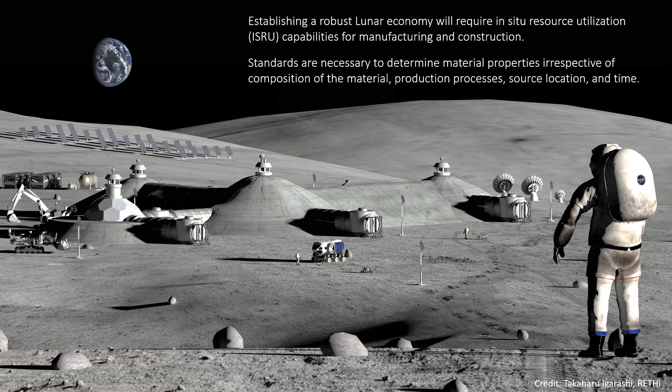According to NASA's Moon to Mars objectives, establishing a continuous human lunar presence will require in situ resource utilization capabilities for manufacturing and construction. To construct safe and durable structures, several types of standards will be necessary to determine material properties irrespective of composition of the material, production processes, source location, and time.

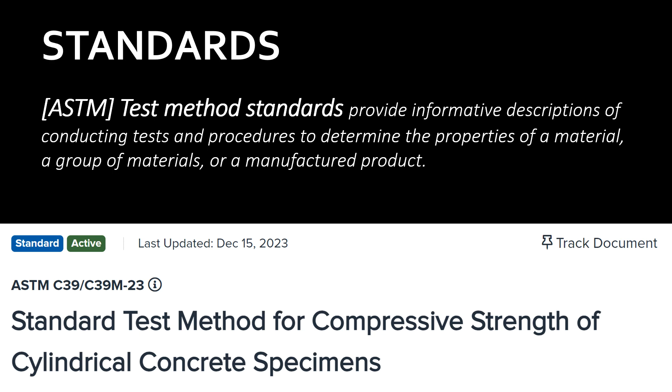A standard is a guideline to perform a type of test, evaluate the results, and define acceptance criteria. They are a necessary tool to perform testing on a uniform and consistent basis. Irrespective of the process used to manufacture a structural material, the material must be tested for strength and performance at scale. Several important gaps exist related to the design and construction of lunar structures.

On Earth, structural design is dependent on well-constrained hazards, loads, and serviceability demands. Structural engineers use these and then design using an appropriate factor of safety or targeting an acceptable probability of failure. These aspects are ingrained in codes and standards that have been accumulated from experience over decades and even centuries.

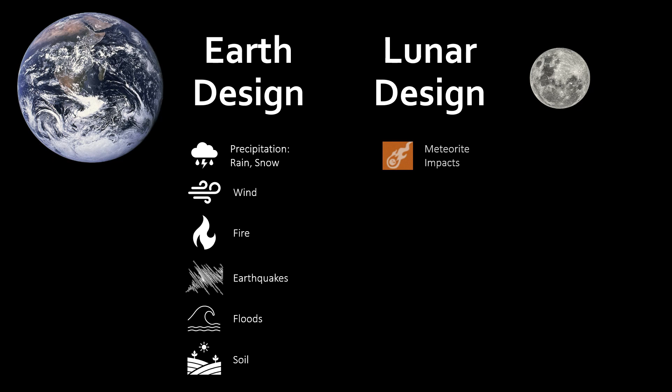The Moon is an extremely hostile environment. Lunar structures will be exposed to hard vacuum, huge thermal cycles, radiation, moonquakes, and micrometeorite impacts. These, combined with the lack of engineering experience in such an extreme environment, mean that engineers must heavily rely on testing of the materials to develop the data needed to design and build safe structures.

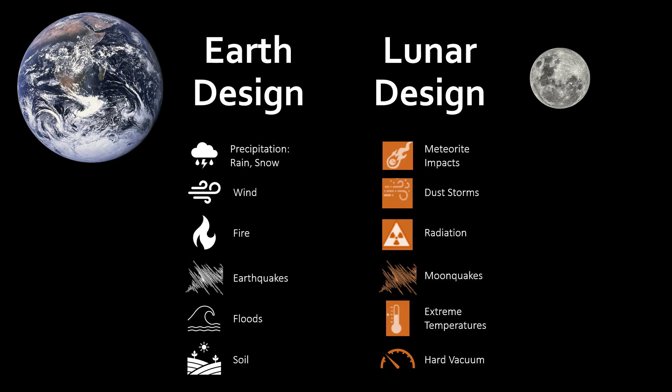As an example, let's explore one of the first ISRU structures planned for the Moon, a launch and landing pad. Aside from quantifying the expected hazards, mass, and payload, engineers must know the behavior of the proposed material under the extreme conditions on the Moon to design this. The environmental factors will influence the strength, behavior, and durability of the material. Plus, a wide range of construction materials and technologies are being proposed for lunar construction using in situ materials.

Regolith-based materials seem to be quite similar in many ways to concrete on Earth. Regolith materials are expected to be brittle materials. They are also expected to have a low tensile strength compared to their compressive strength. However, there are significant gaps associated with the use of regolith-based materials due to the extreme lunar environment.

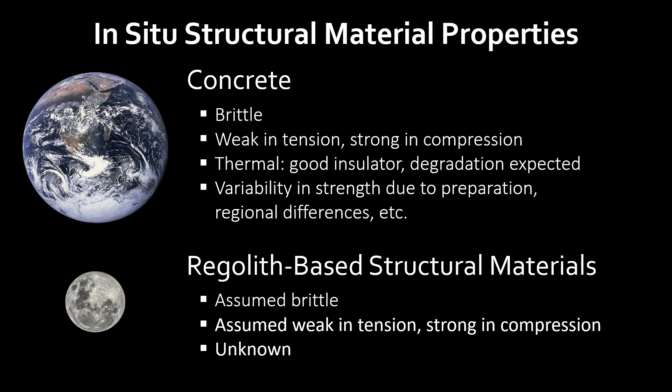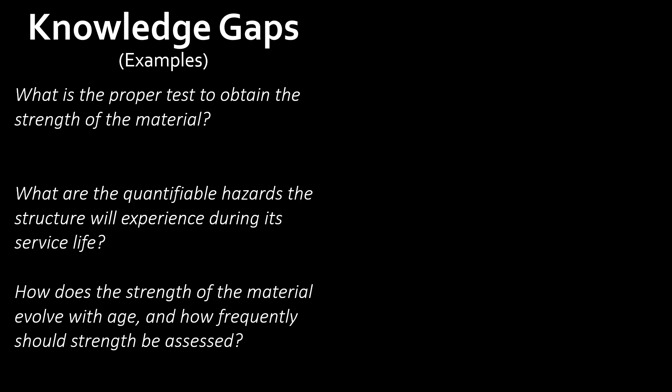Several knowledge gaps exist for the design of lunar structures. For example, what is the proper test to obtain the strength of the material? What are the quantifiable hazards the structure will experience during its service life? Many technical gaps also exist. For instance, how would the data from a standard test be used for the design of structures? And overall, what is the acceptable probability of failure for a structure on the Moon?

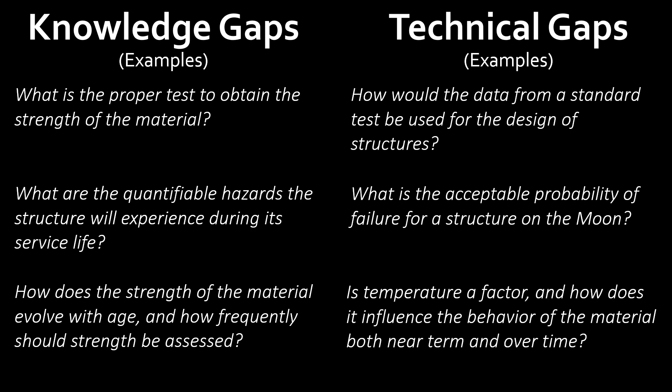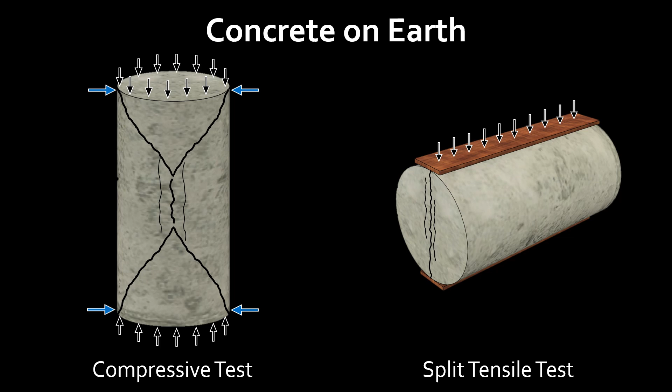A roadmap to establish the standards is needed because we need to deal with a new construction material that we do not have experience with. To illustrate that, we look at our experience with using concrete, a similar brittle in situ material. On Earth, the design of structural concrete is dependent on testing specified by ASTM standards. The most common standard test for concrete is the compressive test, in which a cylinder or cube test specimen is loaded under axial compression.

In structural engineering, the compressive test is important for obtaining structural properties of the material for design. Through ACI code, these values are then used to derive additional structural properties, such as tensile strength, since concrete is difficult to test in tension. The compressive strength is verified throughout a construction project to ensure a consistent strength is achieved.

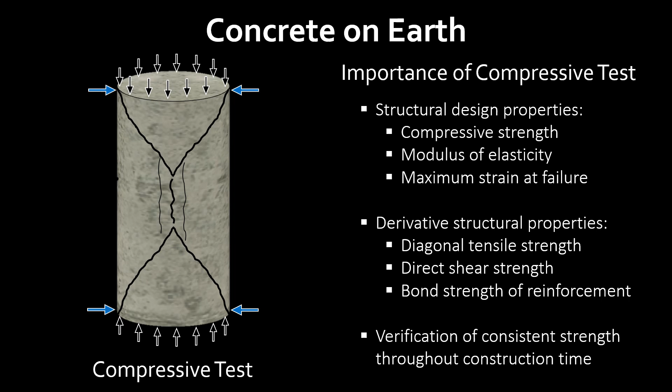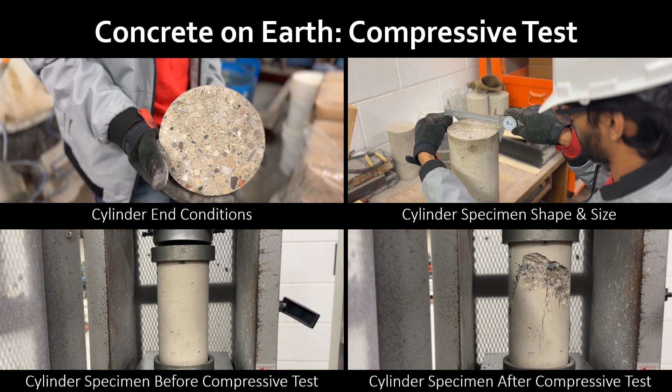The end conditions, shape and size of the test specimen, loading rate, and curing conditions all have a significant influence on the values obtained in a given test. Specific procedures have been established to define how these values should be treated when used for design. Some small-scale testing of specimens made with regolith simulants is being done at this time. However, in terms of regolith-based construction materials, the appropriate size and shape of the test specimens will need to be established based on the properties of the material at scale.

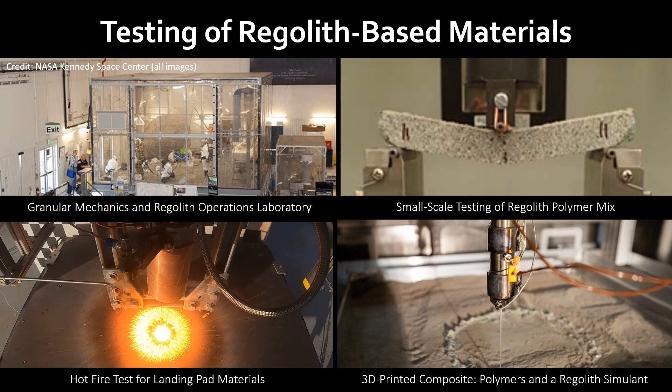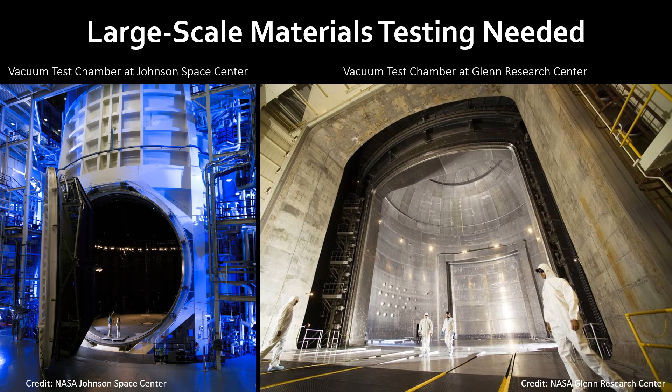Addressing these gaps is necessary to meet the grand challenge of establishing a continuous human lunar presence and a robust lunar economy. Engineers must leverage the accumulated knowledge about the structural behavior of and design using similar brittle materials on Earth. Testing is needed to determine material variability and to understand the influence of the Moon's extreme environment on proposed construction materials. Only then can we begin to design habitable lunar structures.